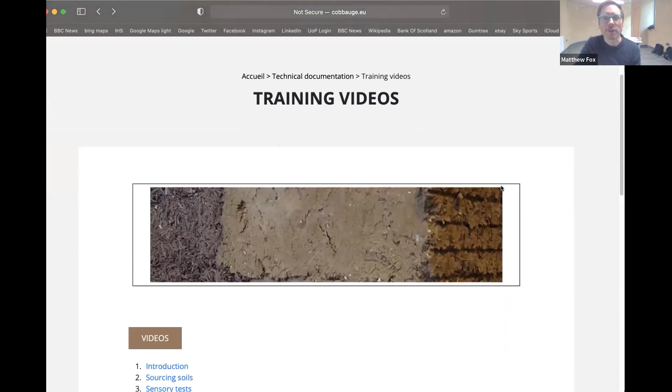This is the website for the training videos. And then down towards the bottom, we've got a video which shows what a designer needs to know. So I'm going to click on one of those, and it takes you to a YouTube site. I'm going to share this video.

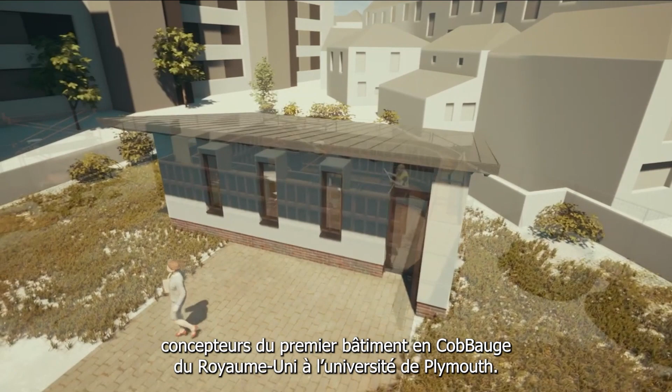Welcome to this brief summary of what a designer needs to know when planning out a CobBauge building. My name is Matthew Fox from Fox Ecological Architects, designer of the UK's first CobBauge building down at the University of Plymouth. This happened to be my first earth building project, which started with a steep learning curve. However, now this building's been completed, I can share some of the lessons learned. So here are my top 10 tips to designing a CobBauge building.

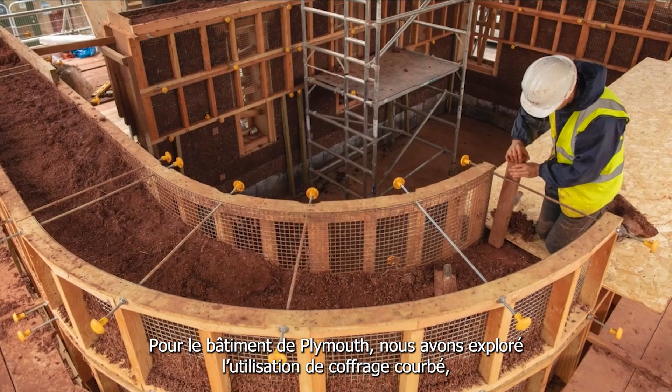Top tip number 1: CobBauge is unlike most other building materials that you'll be used to, so take some time to familiarise yourself with the CobBauge material and construction methodology. There's really no reason to limit your creativity when designing with CobBauge. Whilst there will be some challenges compared with traditional materials, there will also be opportunities to try something new and unique. On the Plymouth building, we explored the use of curved formwork, which proved highly successful at demonstrating alternative design forms to square edges.

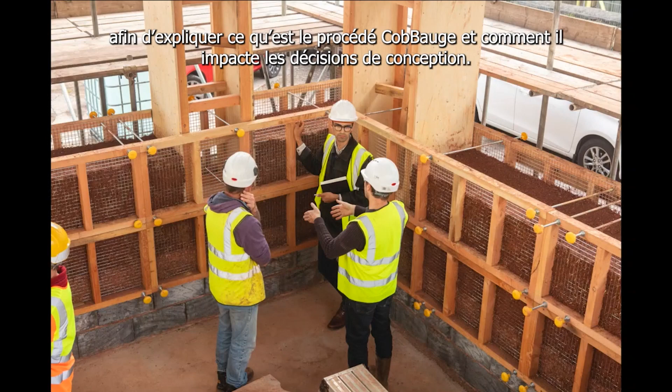Build a team that are open to earth building techniques. On the Plymouth prototype, we worked closely with the client and design team consultants to explain what the CobBauge material was and how this material would impact on design decisions.

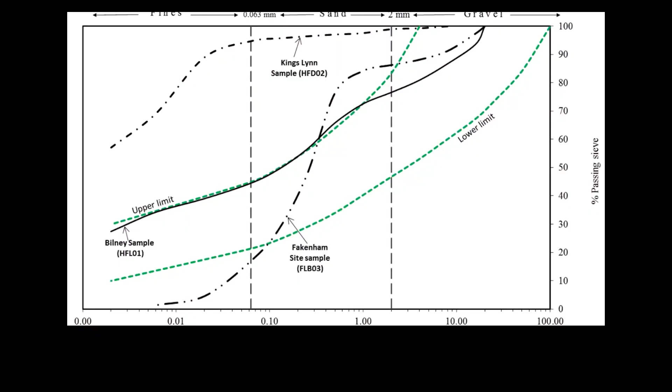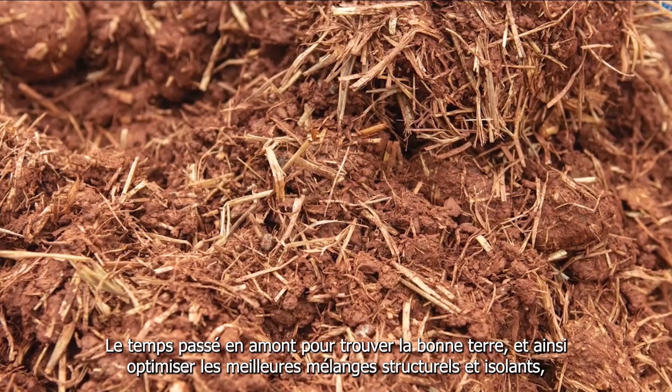Number 3: be sure to source your earthen material before tendering for a contractor. To enable the project to hit the ground running, invest time and effort early on in the design phase to locate the correct earth and fibre materials. This will involve various forms of soil investigation and testing to make sure you have the right earth for the job. Time spent early on to find the right soil and optimise the best mixtures for both the structural and thermal mixes will make site mixing much quicker. It's also important to calculate the volume of soil required to make sure your contractor has sufficient material.

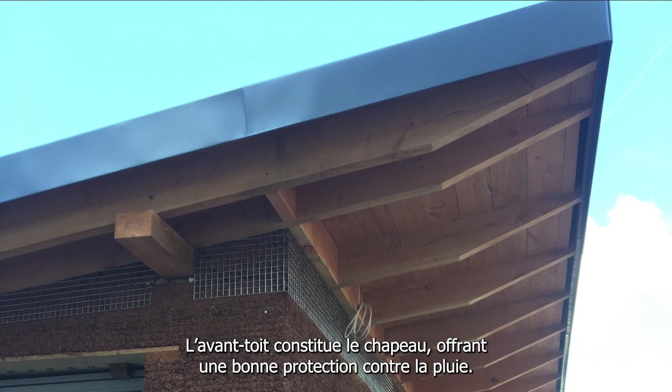Tip number 4: pay attention to the details. As with traditional cob, CobBauge requires a good hat and a solid pair of boots. The hat is the eaves and provides good protection from the rain. The boots are the plinth, which needs to be around 400mm high from the external ground level to prevent splashback and rising damp. Other details, such as window openings and service penetrations, should also be considered as part of the technical design stage. For guidance on detailing a CobBauge building, please refer to the standard details which illustrate key junctions and fixings for a CobBauge building.

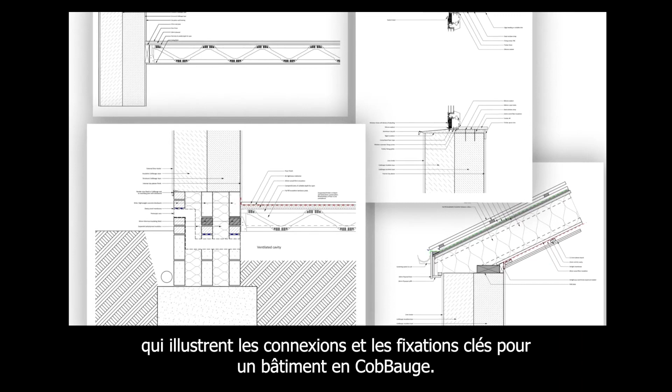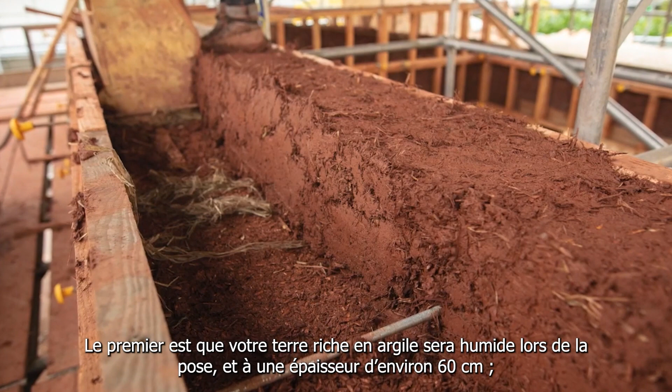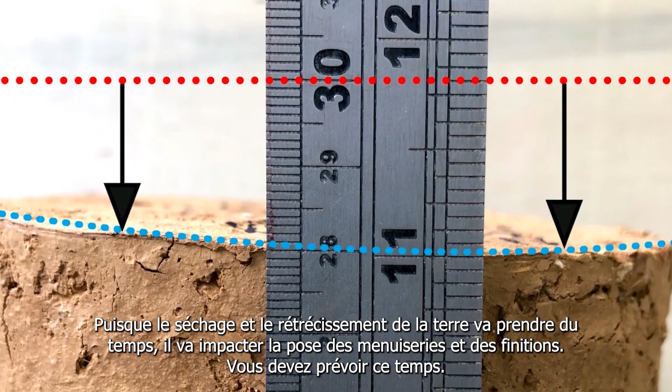Top tip number 5: plan out your build program early on. There are two critical aspects that will impact on the program for a CobBauge building. The first is that your clay-rich subsoil will be wet when laid. At approximately 600mm thick, the wall will therefore take a long time to dry, and while drying, the earthen material will shrink. So you need to allow adequate time for drying and shrinkage, since this drying time will directly impact on the fitting of windows, doors, and finishing the walls.

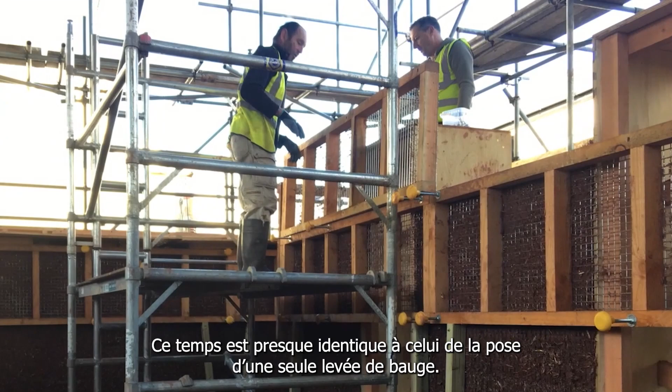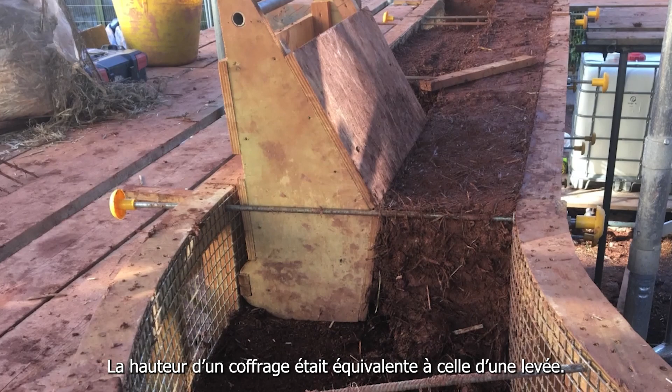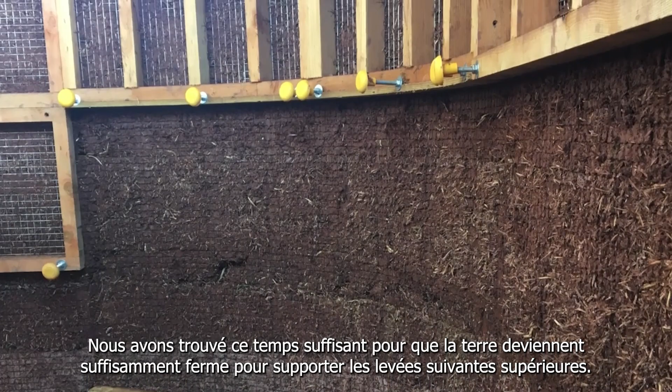The second item to be aware of is the time required to move the formwork. This is almost as long as laying a single lift of cob. Therefore, you should leave sufficient time in the program to reposition the formwork. On the Plymouth building, we had two full lifts of formwork. The height of the formwork matched the height of one lift. We left the formwork in place for three weeks before moving it up onto the second lift. We found this to be sufficient time for the earth to set firm enough to support the weight of the new lifts above. With two or three complete sets of formwork, you can leapfrog the formwork as you rise.

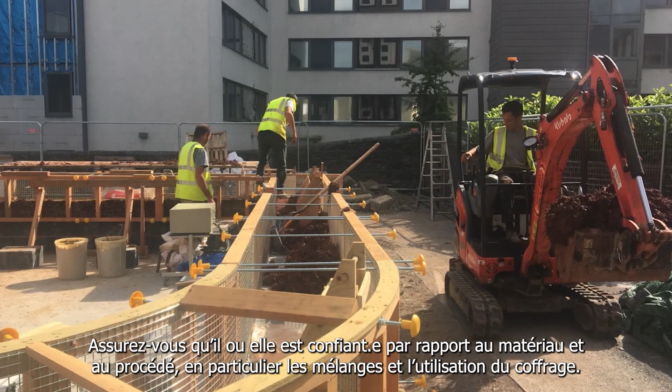Tip 6: work closely with the contractor. When appointing a contractor, be sure to talk through the CobBauge process in advance and in detail. Make sure that they are confident with the material and the methodology, especially the mixing of the material and using the formwork. You should direct contractors to the CobBauge Guide for Builders, which outlines the CobBauge methodology.

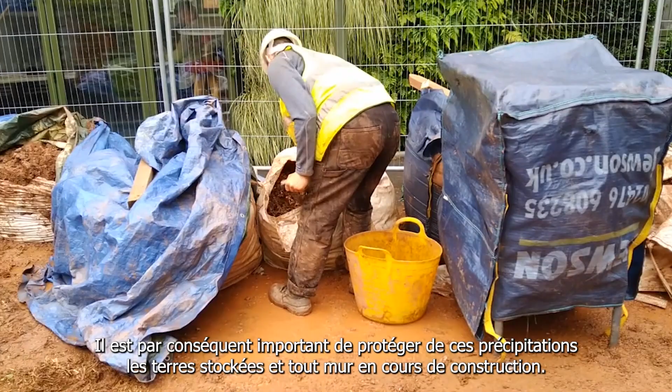Tip 7: keep the walls dry during construction. No one can predict the weather in the UK, and even in the summer we can have torrential rainstorms. It is, however, important to keep the stored cob material and walls protected from precipitation. For the stored material, if this is exposed to the rain, the mix ratio will likely change and become too wet. If this material is too wet, it will take much longer to dry and cause problems later on. For the walls, rain on the wall face is not a problem, but ponding on the tops of unfinished walls can pose problems with water soaking into the material. To overcome these issues, it's important to take protective measures to minimize the risks from overwetting.

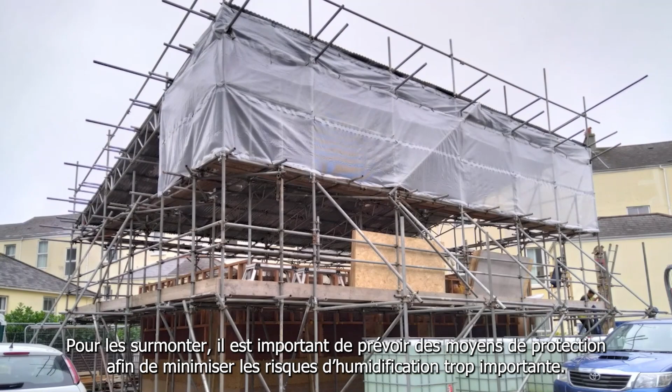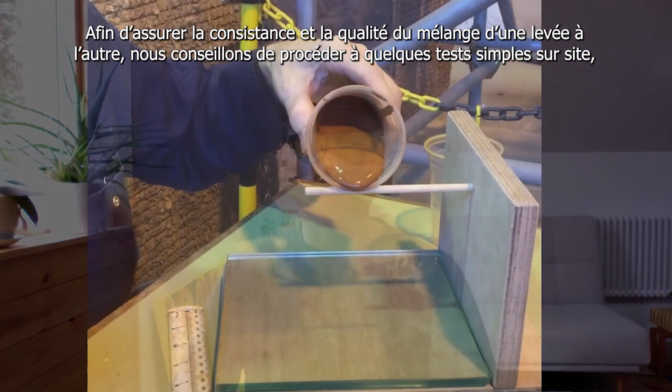Tip number 8: test the materials at regular intervals. To ensure consistency in quality between mixes and lifts, it's advisable to conduct some of the simpler site tests, such as the puddle test or the drop ball test, at regular intervals.

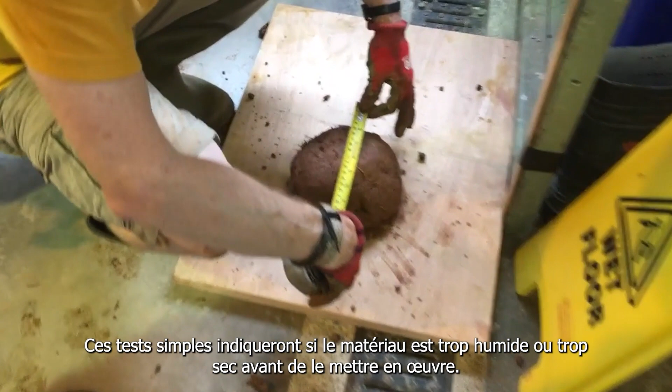Encourage your contractor to get into the habit of testing materials. These simple tests will indicate whether the mixture is too wet or too dry before adding it to the walls.

Tip 9: consider natural finishes for the walls. CobBauge is a breathable construction, and it can take a year or more to fully dry out after completion.

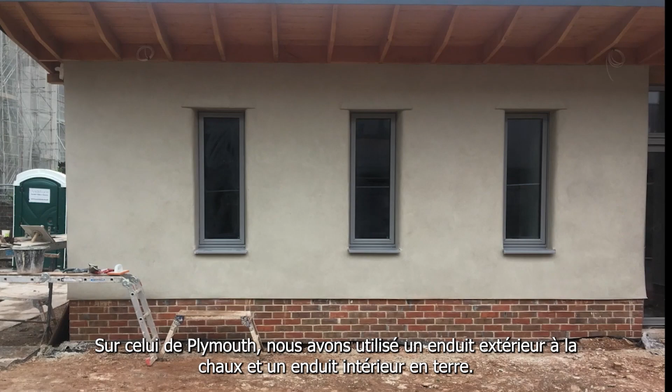It is therefore essential to use internal and external finishes that work in harmony with the overall breathability of the wall construction. On the Plymouth building, we used an external lime render and internal clay plaster finish.

Whilst there are other natural materials for finishing the walls, you need to make sure that you take time to talk with the client through the benefits and maintenance requirements of natural finishes early on in the design stage.

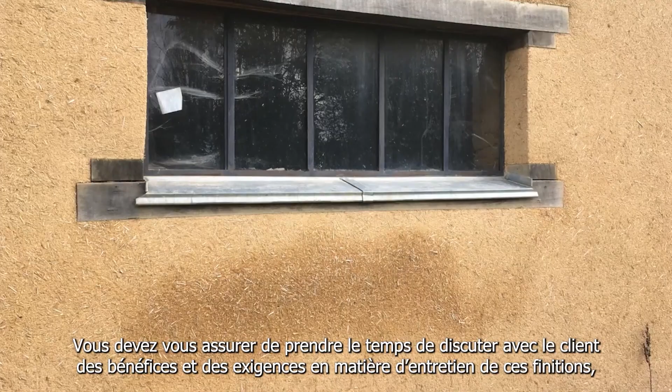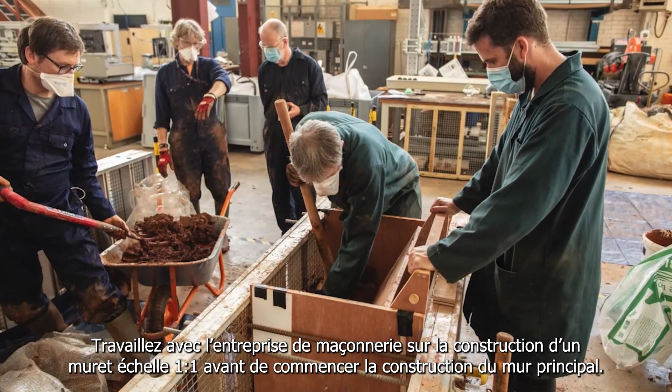And finally, tip 10: build a sample before you start. Work with your contractor to build a small 1:1 scale sample section of walling before they start building the main wall construction. Use this as a learning exercise and to confirm the method of mixing the material that has been proposed for the main building.

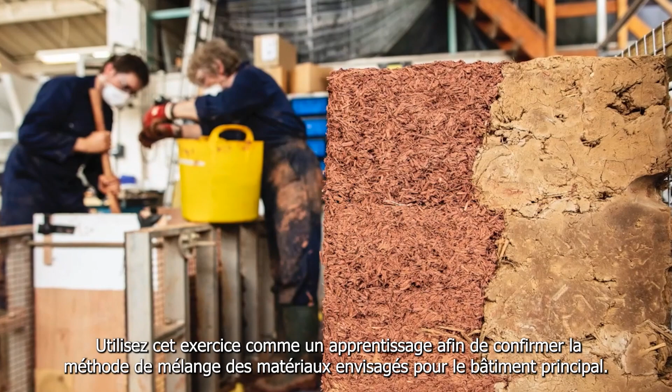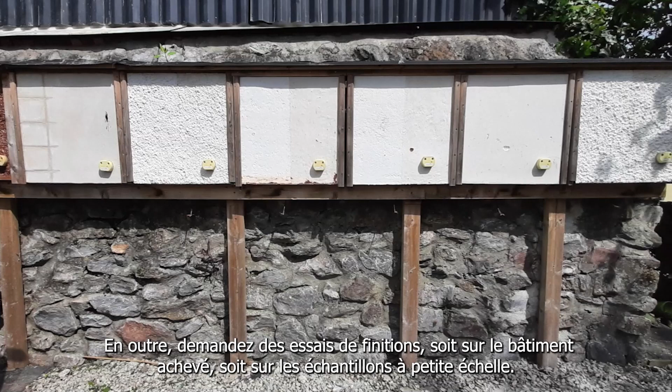In addition, undertake sample finishes on either the finished building or on small-scale samples. This will help to decide upon the best solution for finishing the building.

In conclusion, CobBauge is a rewarding material to work with. As with all projects, the time spent at the start planning and preparing for the build will pay off when you get on site. I'm glad that you're interested in using this material, and I wish you every success with your future CobBauge construction. Thank you for watching.

Thank you, Matt, that was fantastic. That was an overview of Matthew's experience in Plymouth, which was the first UK building.

And now I'd like to introduce you to Anthony Hudson, who's been leading the design of a commercial development in Norfolk, which is currently on site and displays other aspects of the design process.

So you've seen a lot of videos of doing CobBauge, so our role in the whole project... can you see that? Can you see the screen shared? Yes, yeah, oh great.

Our role in the process was to form a kind of design guide for designers, and it's all on the website, which is fantastic. Our guide for designers basically has pulled everything together as a summary of all the things you should consider as you build a CobBauge building.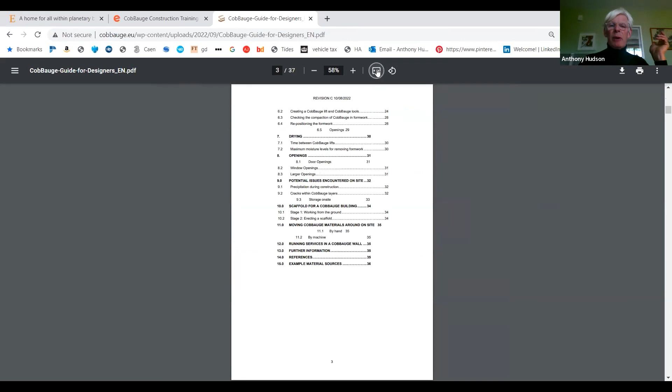But most of the stuff is in here, and the contents goes through the raw materials. I'll quickly run through this — I won't go through the detail because it's too much, but it just gives you a sense of what we've got. It's an introduction, and we've talked a lot about CobBauge up to now.

Then it goes through the raw materials, and a lot of the photographs in this guide are from our build in Fakenham in Norfolk, which we'll have a look at later this afternoon.

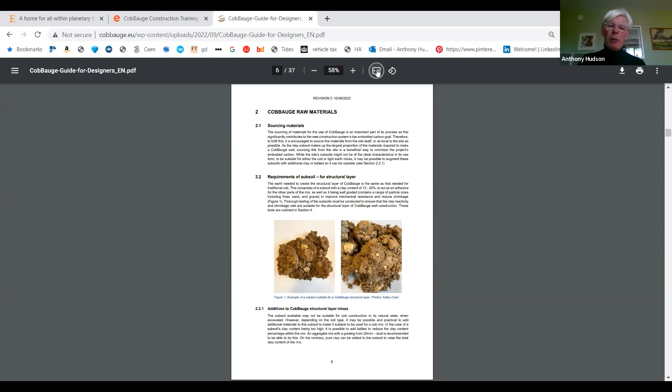This is the structural cob which came out of the ground from a place not very far from the site, which is great, and we had to add a little bit of aggregate to it to get to the right particle size.

This is the thermal — we talked about the thermal clay, this is 60% clay, and this part talks about the needs and the requirements for that thermal lightweight mix.

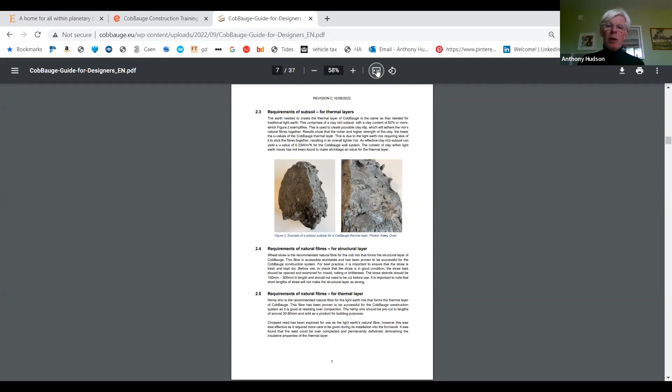We also talk about internal plaster and paint, and you've had some really interesting conversations or comments made by Francois and Matthew on this.

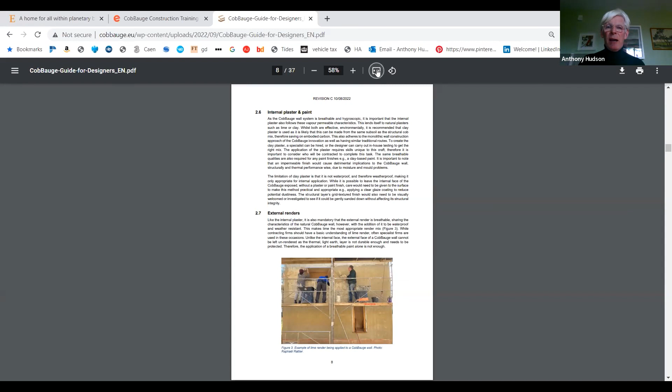Lots of opportunities, and Jim has shown you how these all perform, and this will be also recorded in this little pamphlet here. We then talk about the mixing ratios of CobBauge, and how you get the right consistencies.

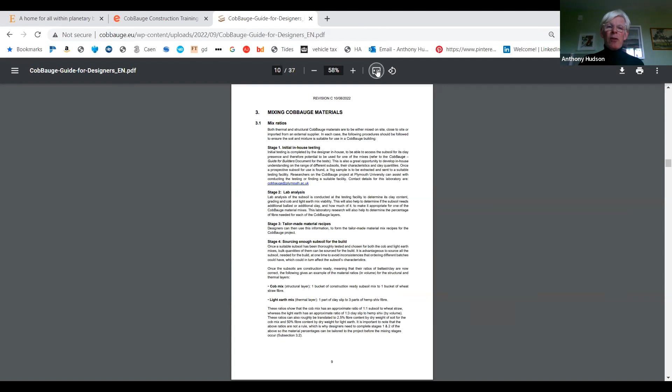And the ways you mix it off-site or on-site, depending on your site size and things like that.

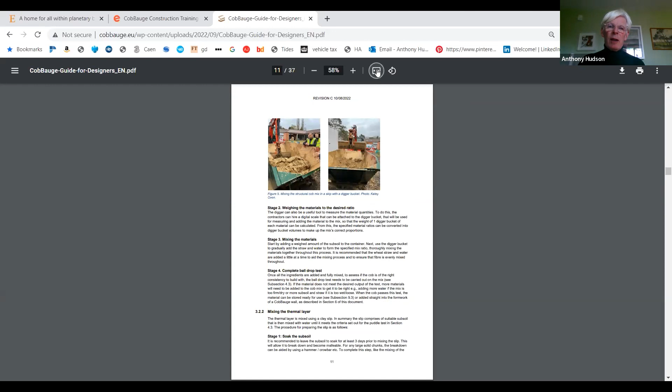Here's a skip, for example, and this is a system we've used in Fakenham in Norfolk. And then we've been talking about how you mix the light earth slip here.

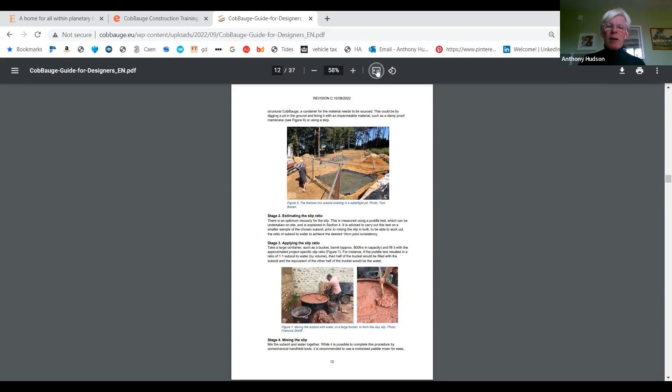You've seen the slip puddle tests and things like that, and this is actually making it in a much bigger vat, a hole dug into the ground on site in Fakenham, and mixing the slip and doing some puddle tests as well. And then also sieving the slip.

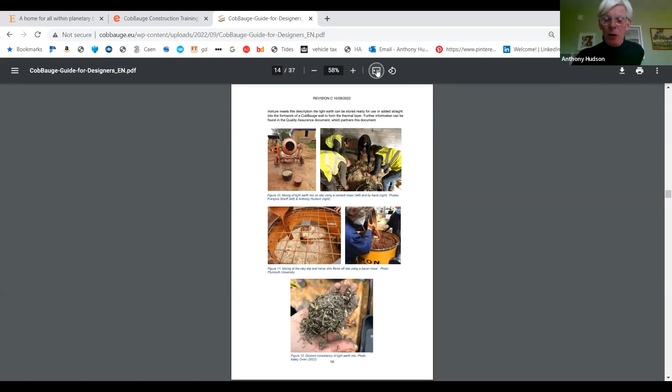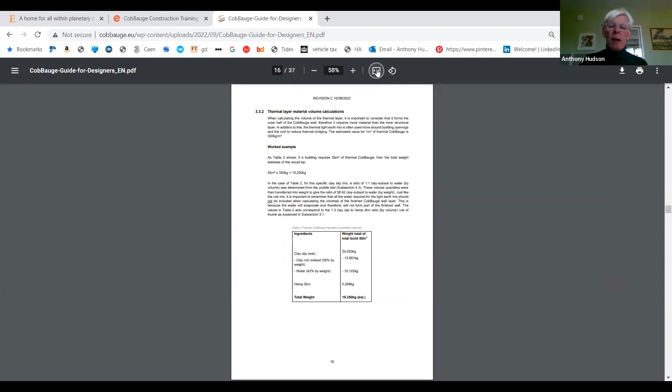And then here are various different ways of mixing the slip and the hemp shiv to create the lightweight thermal mix. And then some guidelines on volumes and calculations that you'll need to be making to get those right consistencies, and also with the light earth.

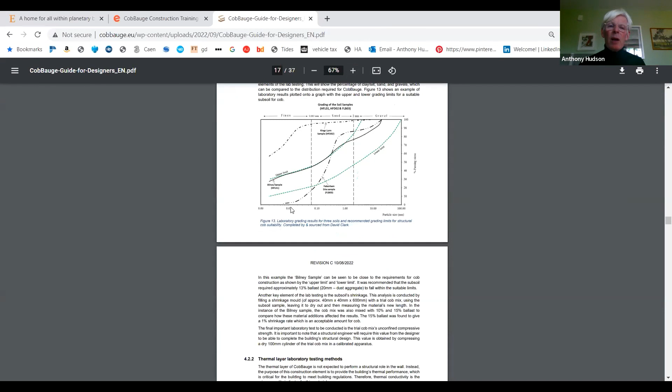This is showing the kind of testing - laboratory testing, and also touch and sensing with your hands. So you've got, as Becky's talked about, getting the sense of what the material's like, but also having to go to the laboratories to actually test these things. And then particle size grading, between these two green lines you can see what's acceptable.

This is for the structural CobBauge, and the material that we found locally was this dark black line here, and that was just slightly outside that green region, so we've had to add a little bit of ballast to bring it into this green region.

This line is for the very clay-rich soil that we found north of the site, and this is 65% clay, and that's actually perfect for the light earth. So that's been really, really great.

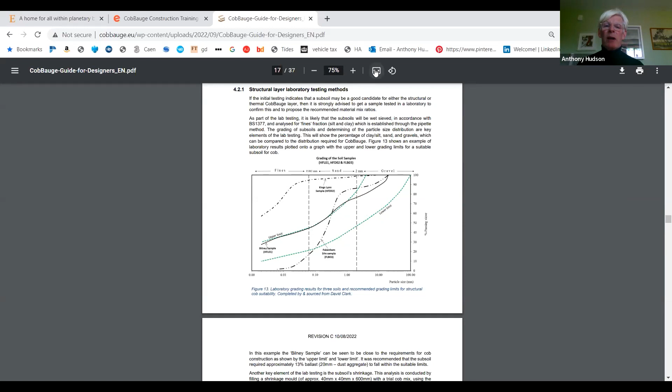So then we move on to testing - for example, for that light earth clay, we wanted to see whether it was still coming up to the same thermal performance that the Plymouth build had. And to our excitement, we were actually doing very, very much better. It's a much stronger clay, and it produced better thermal performance than we anticipated.

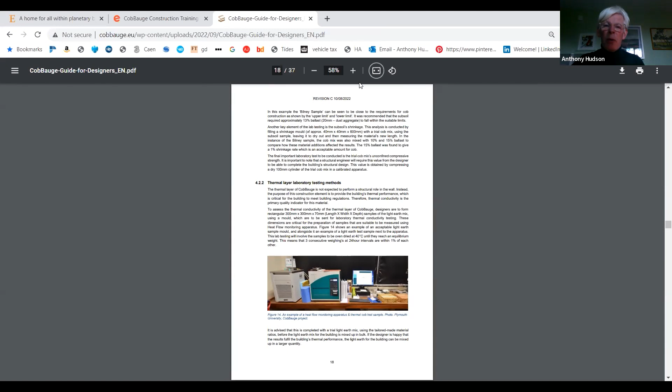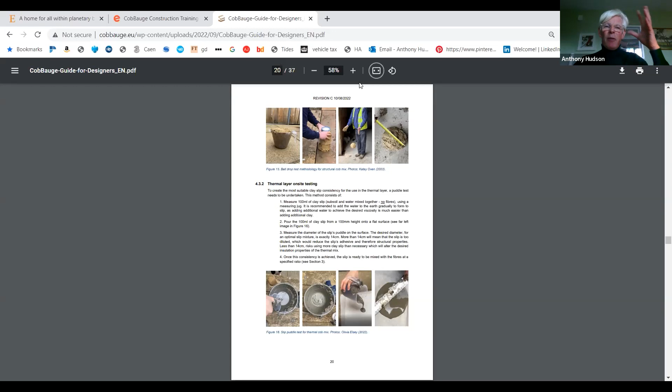And then there's on-site testing. Becky has shown you some really lovely videos of all this, and also Kevin, of throwing, puddle tests, ball tests, and splat tests.

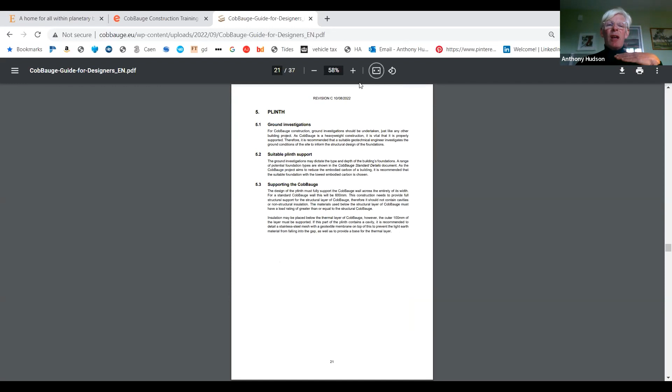And then we go on to the ground investigations and how to best support the CobBauge wall. We've talked a little bit about formwork - there are lots of ways of doing it, and we'll see another way of doing the formwork in our project at Fakenham.

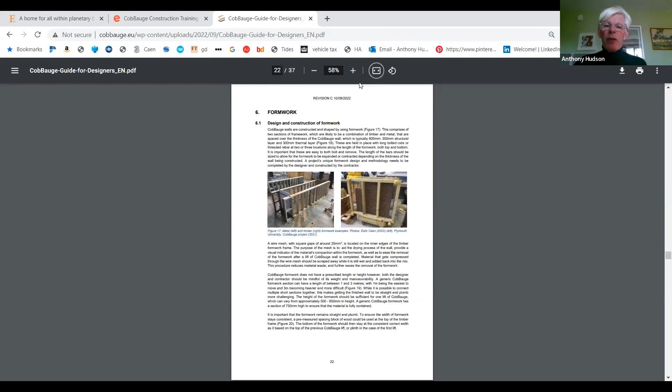And Francois and Roland have talked about this - you can see the metal formwork which was used in France, and the timber formwork which was used in Plymouth. We inherited that timber formwork because we want to recycle it, and we've adapted it on our project as well.

And then we've shown you the diagrams of the different ways of putting the formwork together, and you can see that zigzag arrangement between the light earth and the CobBauge. And then we've got our guidelines for the placement tools and dimensions for them.

A lot of chat has been on why are those angles there - that lower area is 200 high. You can see the lower which counts in at 200 high, which is the lift, each lift that we do, and then the count back in again allows you to get the cob in easily, and the structural cob in easily.

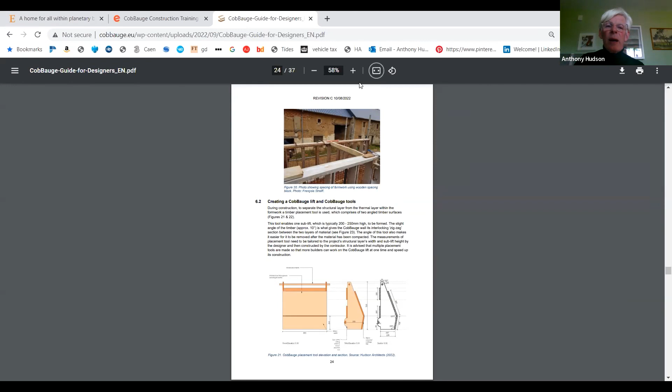And there's some further diagrams of that and the profiles that result from using that.

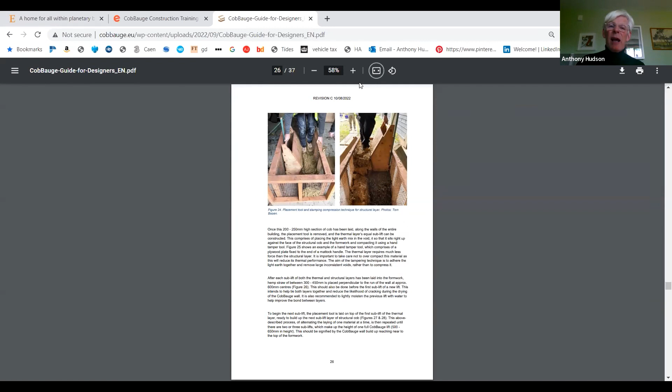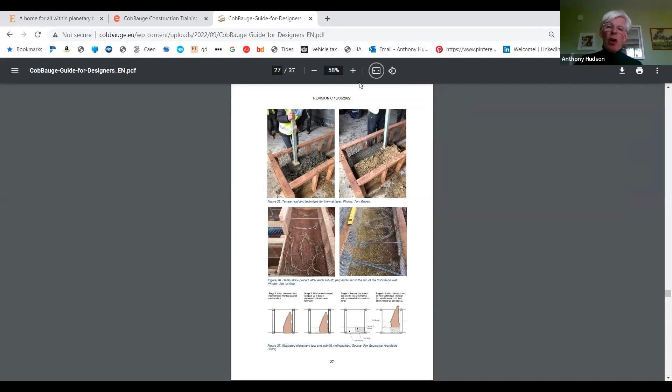And more about laying the lifts, which you have heard quite a lot about, and then tamping the lightweight cob in after you put that first lift of structural cob, and then laying this hemp reinforcement across the tops of each lift to make sure everything ties together beautifully.

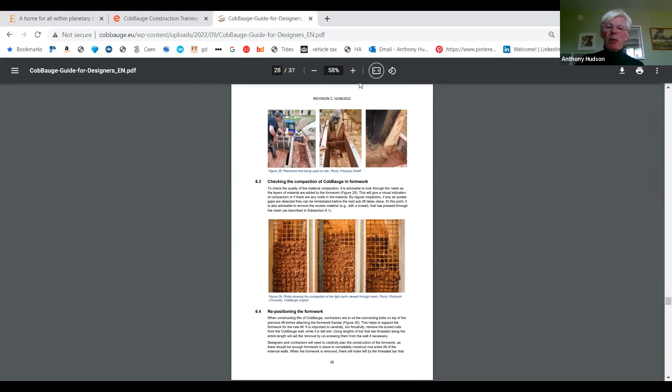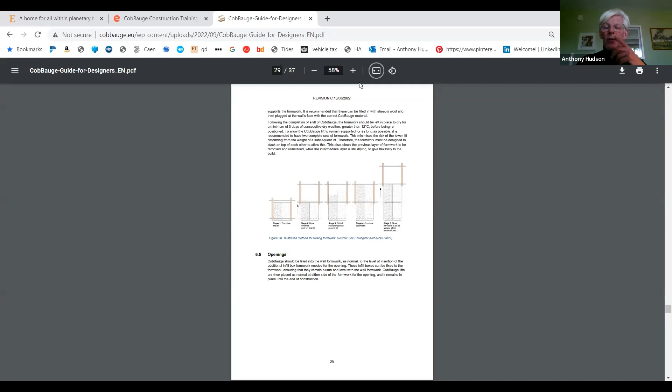Then just some little guidelines about checking the compaction of the cob in the formwork, then repositioning the formwork as you go up in lifts. Again, this is more akin to what Matt and co did at Plymouth, and we've done a slightly different one. We'll be showing different alternatives later.

And then the drying time between the lifts, and the importance of monitoring that moisture content with these Ramin sensors, which Jim has designed and have been really, really useful in understanding how the cob dries out.

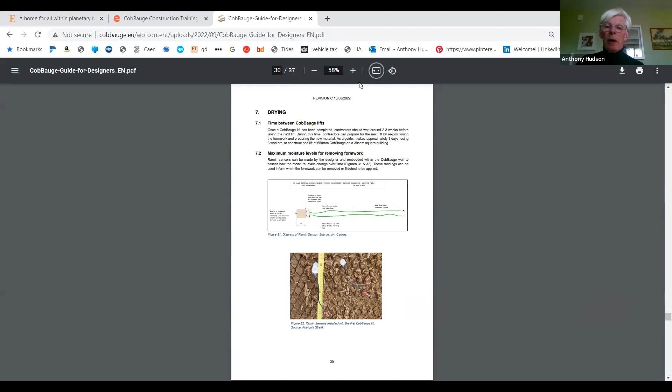We've got a section which we haven't completed fully yet, which is on door openings, window openings, and larger openings, but we can look at a little bit more detail on that when we go to the details.

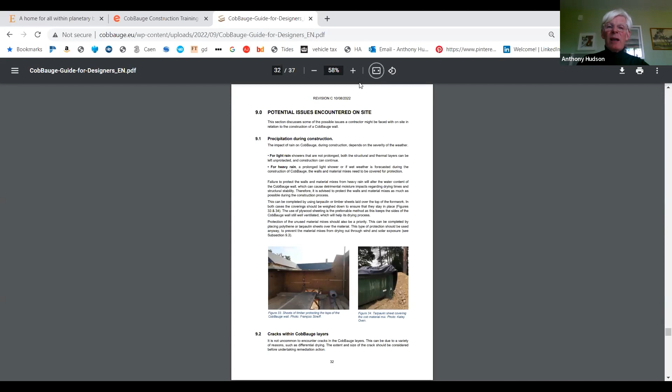And then we've got a section on all the issues that you might encounter on site. For example, if things are drying out too quickly and you get cracks, how you might mend those cracks, and how you might sort things out that you didn't quite expect.

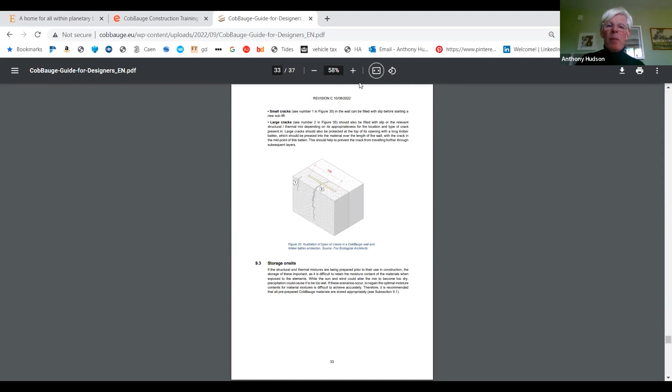Then we do a little bit about the scaffolding and where it should go. On most of the sites, the Plymouth site and the Fakenham site, we have the scaffolding on the outside of the building. Lots of discussions we had yesterday at our open day about perhaps putting it on the inside, but these are all developing ideas as we get to do more and more building with the CobBauge system.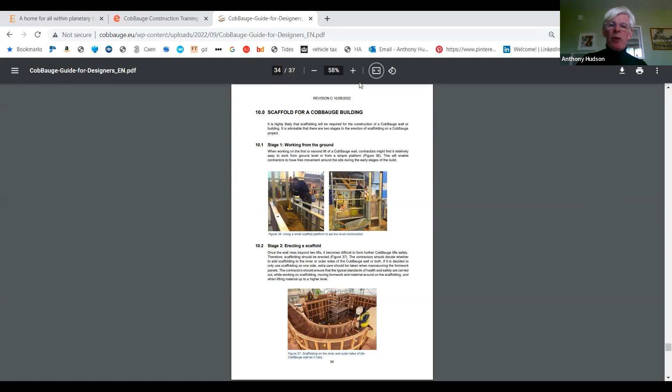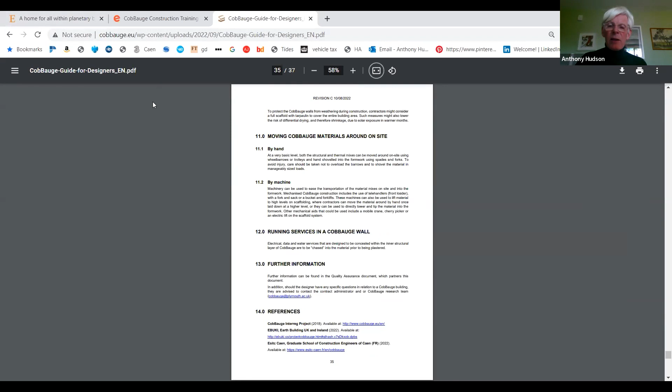And then we're moving CobBauge around the site and how that works. So that is kind of a brief run through of our method, our guide to designers. I would like then to move on to the details.

And again, it's in this document here, technical documentation, so we then go to design details. These are a set of generic details. Some of them were developed in France, some of them were developed in England, and then we now pull these all together.

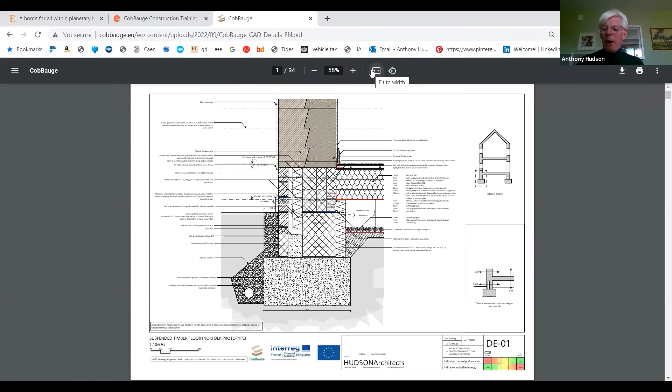We're basically going to go through relatively quickly. Again, they're all on this website, and they'll be sort of added to as well. But we've got foundations, we're looking at windows, we're looking at intermediate floors, and then we're looking at eaves details.

Now, here's a detail that's very close to the detail we're doing in Fakenham in Norfolk. It's a suspended floor, but the most important things you'll see here are the 500 millimeter plinth. We could make that lower, but I think it's probably advisable it's this height, just to stop the splash back, and we really don't want to get moisture into the lower bits of the cob here.

You'll notice there's a damp-proof course down here. We don't want the damp-proof course up here because that'll trap moisture. We want the moisture to be able to come through the cob. The most important bit of the cob to support is the structural cob, which is this width here.

Let's go to the structural cob, and this is the lightweight, light earth cob here. So this is where we need the support, and this is where the loadings come. And then we have a thermal break between the side finish facing, which could be stone, but in this case it's brick here. And then we have our suspended floor, which runs into the plinth here.

There have been lots of various kinds of variations on this plinth. This is very much the plinth that Matt has used on the cob building at Plymouth, which is a ground bearing slab. This is foam glass here, foam glass infill here.

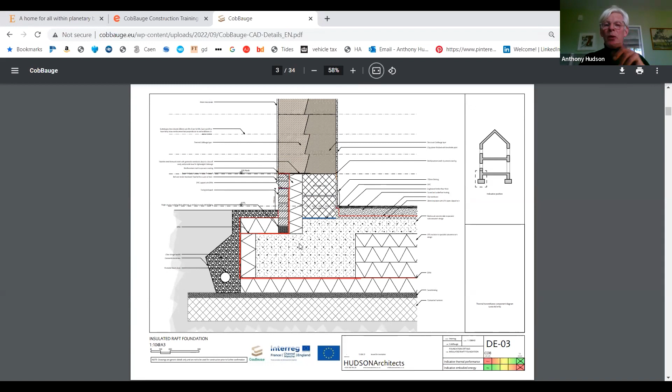This is sort of based on a passive house detail, a concrete slab which is all encased in PIR. Obviously incredibly embodied energy there, but we just thought we'd like to show the variety of ways you can go about this. And then here we've got a rubble foundation.

This is what we wanted to use actually on our project, and when we got it through building regulations, but when it was costed up by the builder, it was discovered to be too expensive, and then we reverted to a concrete foundation.

Window details. You've seen Raphael and Matt have gone through, and you've seen those views from the outside. Here's now a kind of cutaway of how it all works, or how some of them work.

And again, this is a combination of Plymouth, Fakenham and French detailing. The crucial thing here, I'm going to move to, this is a window on the outside. We've got windows at different places in the construction.

This is probably the most likely one, a window set back from the face of the CobBauge by about 150 mil, but it's in line with the lightweight, so that you don't get too much of a thermal bridge.

Crucial things to notice here: the lintel is a plywood base with three 150 by 50 kind of upstands here, all embedded in the cob, and that is set in the formwork as you build up.

So that's just then you backfill that with the CobBauge system. Another thing to note is this 45 mil gap here, which allows the window to move when the lower bit starts shrinking. It allows movement so that window can then push up and fill that gap there.

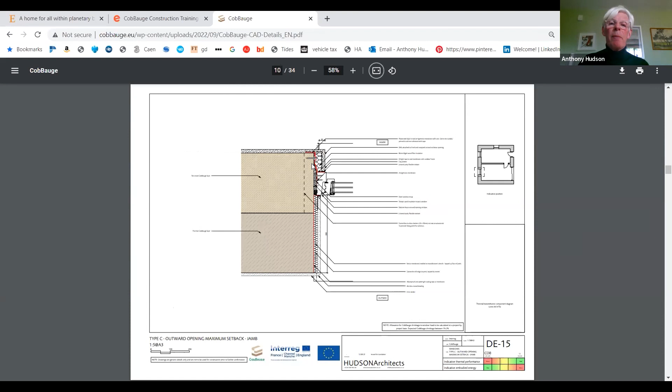Again, jamb detail, and then more positions, and we've got door, inward opening windows, etc. You can go through these at your leisure. I'm going to quickly run through this, and then there's that very deep one here.

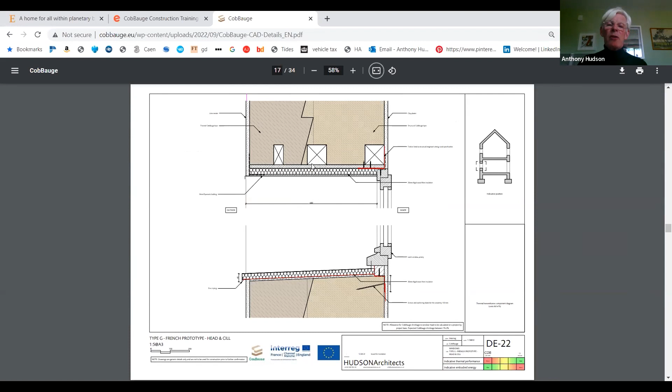It's slightly different from what Raphael showed, but it shows you the window totally on the inside. And the jamb, the way that they've fixed it, they've got built-in timber in the CobBauge wall to fix the jamb to.

Roof details, pretty simple really. Obviously keeping all the strength, all the support on the structural cob, the wall plate then kind of fixed with heavy bolts down into the cob there.

Continuing your insulation of the lightweight earth up here against the end plate to a posi joist or a joist there, and then meeting the fully insulated roof as there, and then obviously pitched roofs.

We've got a flat roof, eaves and gutters and green roofs, and then we've got something like this, similar in Fakenham, a kind of good overhang there.

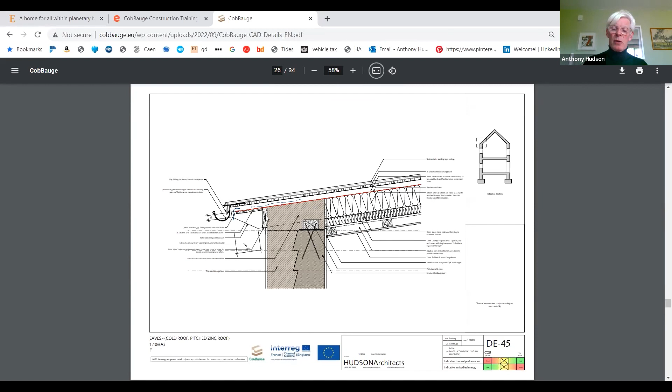Parapets, depending on what the condition is and how you want it to work. Again, another eaves detail there. This is the 500 - this is actually the detail we have on our Fakenham project, a 500 overhang.

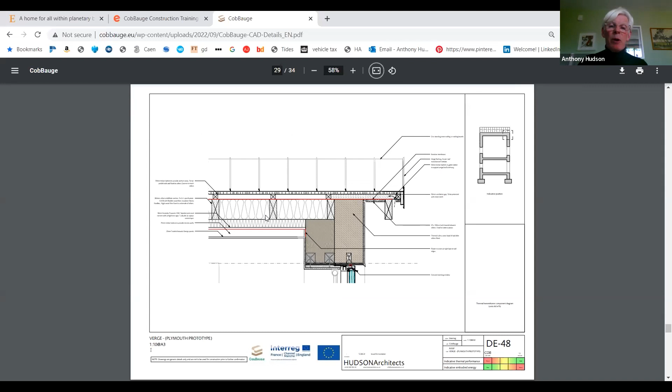And this is something similar to the Plymouth prototype with the overhang verge like that. We talked, again Raphael talked about this, a sort of intermediate floor bearing, building timber into the structural cob, various ways of doing that.

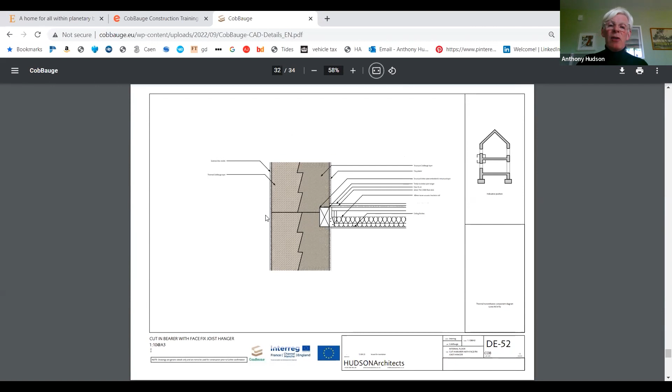So I'll quickly go through those - building in there, and then cutting in joists, which was, I think, that one there.

And then finally, the issue of, if you've got all your CobBauge bearing walls and you're wanting to fit out without waiting for everything to shrink, you've got to allow for any walls that come up against it, and also the roof, any wall support coming underneath the ceiling, to be able to move to allow for the shrinkage of that CobBauge.

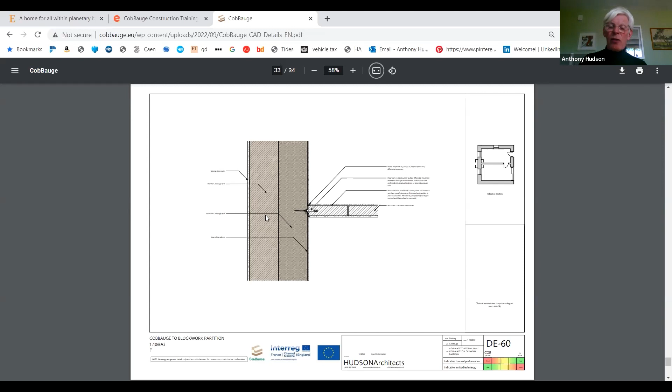Because obviously intermediate walls, if they're made out of either timber or blockwork or something like that, or a cob block which has already been dried and will have already shrunk, you now need to allow for that vertical and horizontal movement. So there's a series of details which allow for that, and they've got these sliding details - we have a sliding detail similar on top, underneath the ceiling.

So that takes us through all the details, and it has to be a bit of a rush, but I hope that helps.

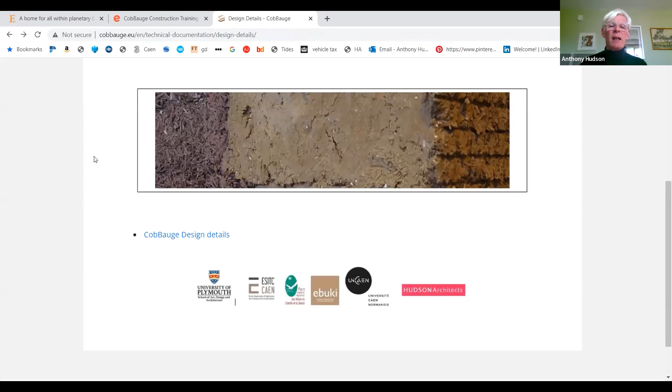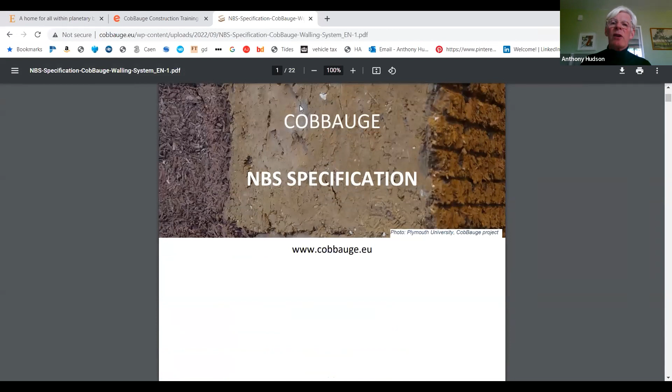And then finally, just for our UK contingent, we have done an NBS specification, which would go with all your other NBS clauses, for that suite of NBS clauses, and we've covered both two things: the walling system and the formwork. So I won't go through the detail of that, but that's also on the website.